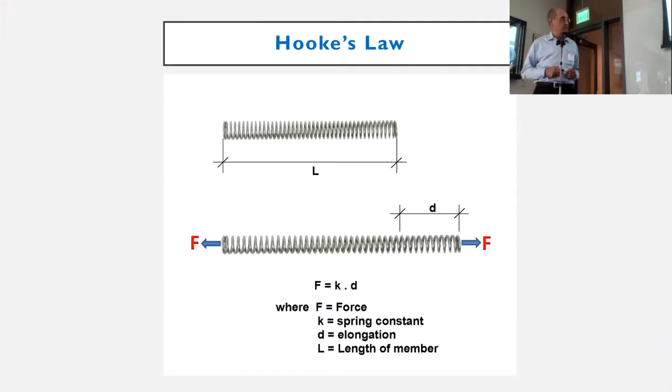I showed you the rubber band, what I was talking about, and that is when you pull it a distance, 1 pound and 2 inches, etc. But there is this direct relationship. The force equals the spring constant times elongation, and that is Hooke's law. And as I said, up to the end of the 18th century, that was the basic equation engineers used to make determinations on calculations, etc. So along comes Thomas Young, and what he does is as follows.

He says that there is a requirement that when you are trying to find out how material is going to behave, this K, the constant, is basically related to the material that you're testing. You need to know the area of the material. You need to know the length of the material. So in order to avoid all this, he formulated what has become known as Young's modulus.

For example, in concrete, in structural analysis, we're looking to see how much stress is generated in a member, typically a flexural member, compared to the strength of the material. So the stress is what we are calculating, and that is where Young's modulus comes in. We want to know whether this stress will be greater or less than the strength, and that will tell us whether the section of material that we're designing for is adequate or not.

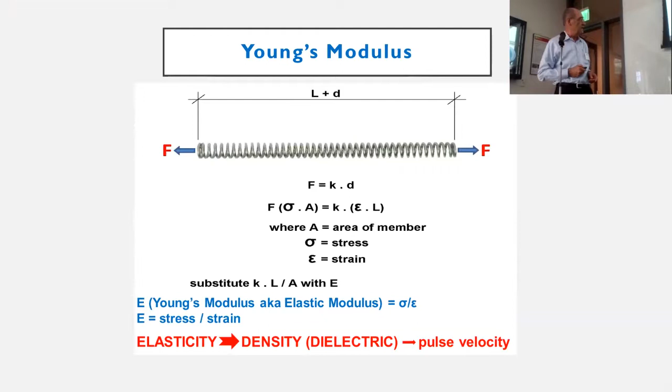Based on the equation speed equals distance over time, we can calculate how long it's going to take for that sound wave to go through the concrete from one side to another. So those are the basic elements that we're looking at. But like I said earlier, density is what you should keep at the back of your mind, because that's really what we're talking about. Okay, here's GPR data.

This is the most recent sophisticated piece of GPR we use. It's a small handheld piece of equipment. Mark Olson showed you, I think, one photograph of it anyway. But I want to show you how simple it is. It is a cart, it's got wheels at the bottom, and you just push the cart along the surface. It could be along a slab, and I'll demonstrate this later on, or along a wall,

and the cart picks up an image. The way it does it is it sends a signal from one side of the cart into the concrete or whatever the material is, and then that comes back. And it's the dielectric constant of the material that really tells us what it is. But the basic principle is that we generate a set of hyperbolas.

So just looking at the top graph here, this is a cross-section through a slab. This shows the top of the slab. This hyperbola, which shows the intensity of the steel that we just picked up, is because of its maximum. That is where the rebar or the steel is. And then you can see one here, one here, one here, etc.

So the way we do it is we push this cart along the surface. Let's say it's a concrete slab, and we'll pick up these hyperbolas. When we pick them up, we mark them up on the slab or on the wall, and that tells us where the rebar or the post-tensioning or the conduit is. So it's very simple, but I want to warn you that it is operator sensitive. Not everybody should be using this without going through a class on this.

Prior to GPR coming onto the scene, which was about 20 years ago, we used to use X-rays to find out where the rebar is in concrete. This image is of an X-ray, just like you would get at a doctor if you broke a bone. It shows you, through the concrete, the materials that have higher density in focus. So we've got here steel, steel, steel, crosswise in the center. This shows us where the steel is.

And the intensity of what you're looking at is developed through the equipment that you're using. So this could be higher intensity or lower intensity. But as you can see, the larger the density, this is more prominent, a lighter in color material. So this is all concrete. This is concrete, concrete, concrete. And these lighter lines are reinforcing steel.

Can I ask you a question? Sure. How do you determine a layer of steel? Top layer, bottom layer, can you determine that? Yeah, good question. Let me answer first with the X-ray. The X-ray is hardly used anymore because that's one of the difficulties. But the X-ray had a beauty to it because if you knew the thickness of the concrete and you could measure this distance on your X-ray, then by similar triangles, you can find out what the size of the rebar is, okay?

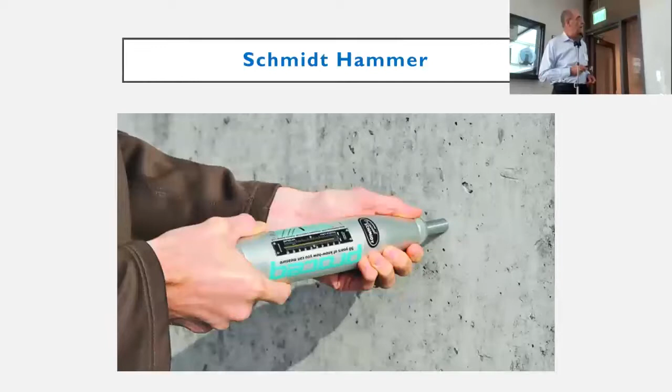So what you have to do is chip out one location. Once you've done that, and you know what that bar diameter is, then you can tell what the rest of the bars are in that configuration. Okay, so that is a slight limitation with the ground penetrating radar. Okay.

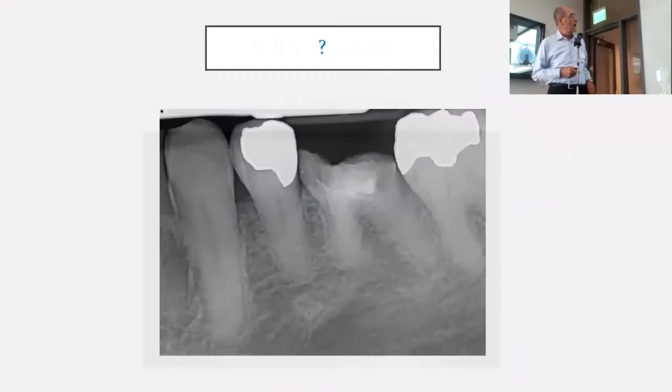Can anybody tell me what you think this might be? Excellent. Okay, this is an image. When you go to a dentist, and the dentist takes an X-ray image of your teeth, this is how it shows up. And this is exactly like the concrete image I showed you previously. See that? It's a difference in density. These are actually my teeth at a recent dental visit.

And here's the thing. This material down here, that's your gum. This material here that's slightly darker in color, that's the tooth. And this material that's very bright, that is the filling. So this is an example of how this X-ray works. It's basically a color difference. And you can use this type of image to investigate concrete, slabs, conduit, rebar. All these things can be done because of this imaging. So this is a very powerful tool. The GPR and the X-ray are very powerful.

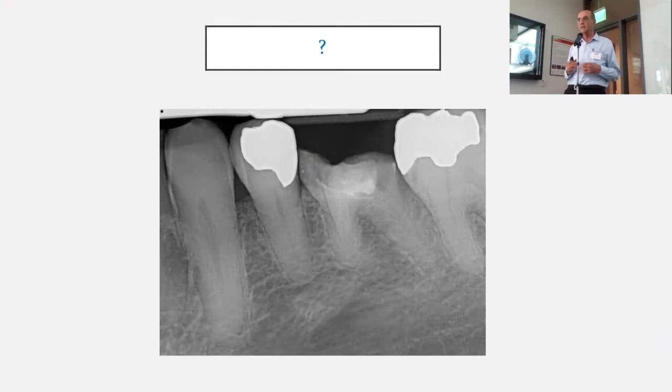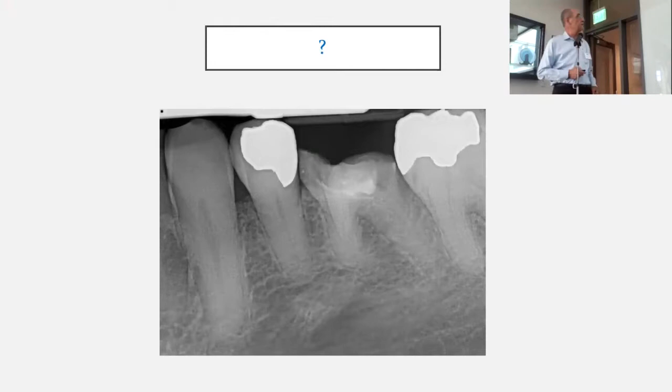Now, the problem with the X-ray, as most of you know, is that you need to protect around it when you actually shoot. That's why when you go to a dentist, they always put this cover on your chest to make sure you don't get any of the X-rays into your body. But GPR doesn't have that constraint, because it's totally okay to do, and it has no consequences that could harm you physically. These are the issues I wanted to talk about in terms of X-ray and GPR.

This slide is of a Schmidt Hammer. A lot of you are probably familiar with the Schmidt Hammer. The Schmidt Hammer gives you a relationship with the compressive strength of the concrete: this part of the Schmidt Hammer registers a number. So we have a number like 30 or 25 or whatever. And then we have a chart which tells you if it's, let's say, 25, it's 3,000 PSI concrete, etc. The beauty of it is it's non-destructive. Otherwise, if you wanted to know the concrete compressive strength, you have to take a core out.

Yeah. Do they have Schmidt Hammers for reinforced masonry? You know, you could make one, invent one, but there probably is not enough of a need for it. I mean, it's just a calibration of the spring constant. It's the same spring constant that I showed in that first slide, which was showing the F equals KD relationship. Spring constant tells you what the force is.

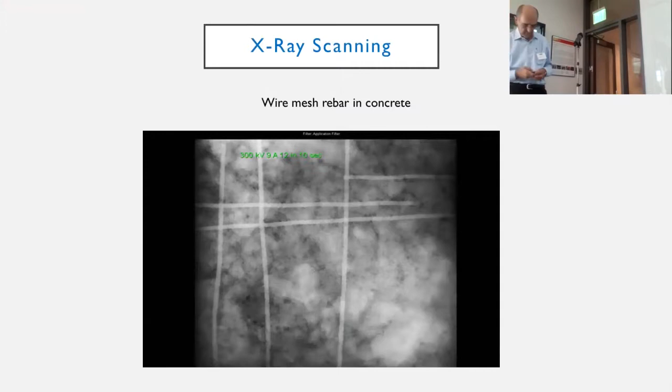But what you can't tell is the diameter. That's the unfortunate part. I went to training on this as well, and you need to calibrate it for each concrete slab or wall you're working with. No, you don't need calibration. It's already pre-calibrated. What you're measuring, again, is energy that's sent down into the concrete, and it's picking up a different type of energy when it hits steel. Now, it's possible we had plastic conduit, other materials too. So when it bounces off of that, it tells you where the location is.

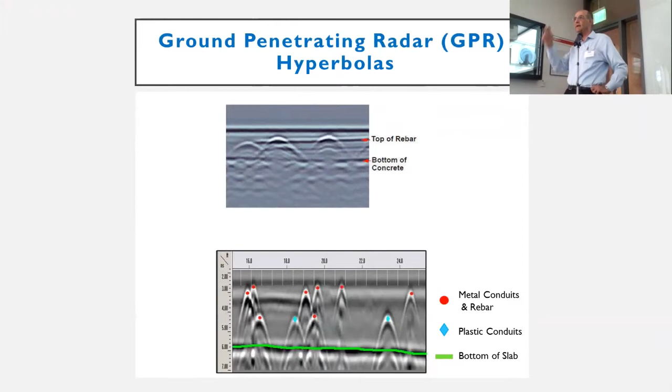Sorry, going back to the Schmidt Hammer really quick. What's the difference that you've seen between the surface concrete and the inner core concrete? What's the biggest delta that you have seen, and what would you estimate as a conservative deduction off of what you would read off of the surface? That's a good question. It's very difficult to tell.

The surface concrete that you're actually hitting with the Schmidt Hammer is measuring the strength of the cement paste in the concrete. Cement paste may or may not be the determining factor of the strength of the concrete. And as we know, compressive strength of concrete is really dependent on the water-cement ratio. So it's possible to have a really low water-cement ratio right at the surface, but inside, within the member itself, it's not that strong. And this is the problem with it.

Whereas when you core, you take a 4-inch, 6-inch, whatever diameter core, and you bring it back to the lab, then you're testing the entire section. So the surface strength does not play a role in this determination. So if you return 4,000 PSI, me saying I'll assume 3,000 or 1,500, it's just off the table to begin to say. Did you want to say something?

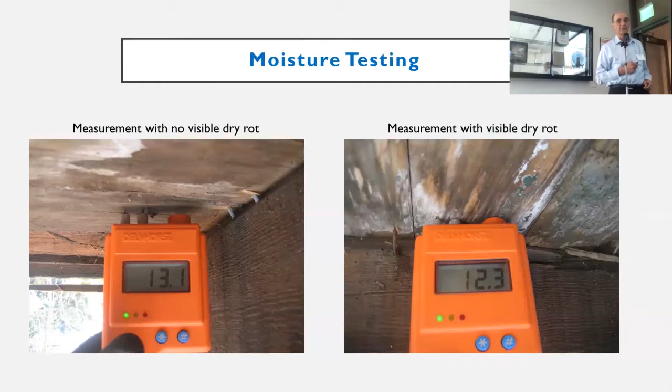This is a situation where there's no visible dry rot, but there's quite a bit of moisture. Recent rains or whatever could have moistened the plywood, and you pick it up in moisture content, but it doesn't show. Dry rot, there's visible dry rot, but the wood is dry. Not much visible dry rot, but it's pretty wet. So that's a good question. Okay, let me just go to the next slide.

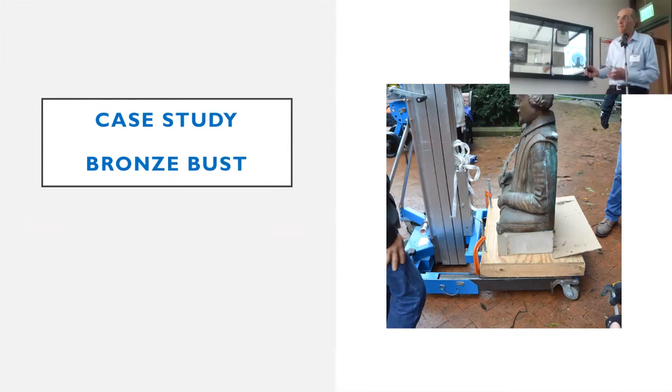With the GPR, scanning the surface and the other four surfaces and the bottom of the concrete, we could determine whether there was something metallic. The point was, was there a dowel that attaches the bronze to the concrete, or was this bronze sitting on top of the concrete with maybe a mortar mix or glue, something like that. And we were able to find out that there were 4 rods inside that concrete that you can't see, coming from the bottom of this pedestal all the way into the bronze statuette. So that's an application where GPR came in useful. It wasn't the typical use where we're looking for rebar.

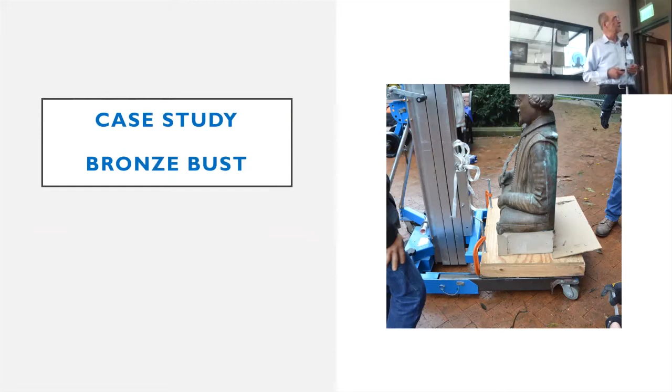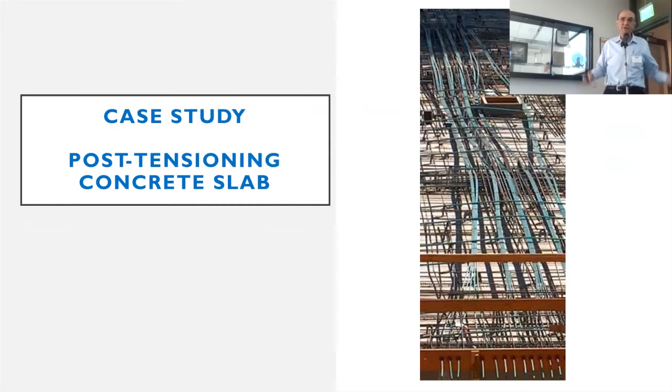Okay, this is the situation. To cut you off here, but he's on a time schedule. One more slide. One more?

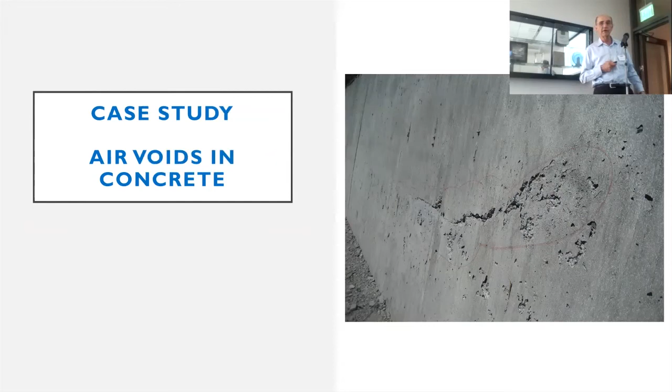Okay. This is a wall with adverse problems on the concrete surface. We talked about using the transducers to try to figure out whether there's voids inside. You can see the voids on the outside, but how do you know whether they're inside or not? That's where this comes in, the ultrasonic testing machine.

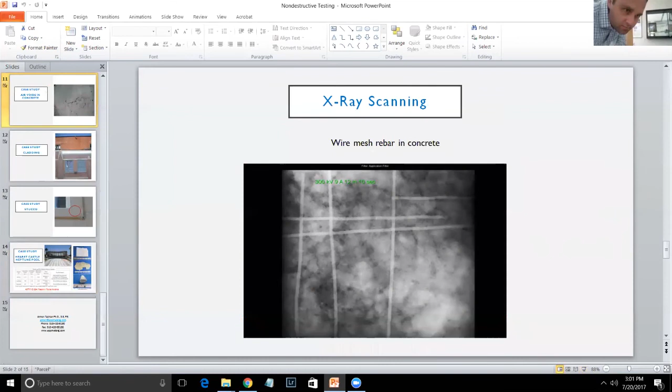Two quick things. This is actually for the benefit of our architect friends. This main issue here is when you have, oops, sorry about that. You have to go all the way back. I can skip you ahead. We need to move forward a bit. Okay, next one. So, oops, I'll skip the stucco one. Brick one is most important.

Where do you use the borescope? This is a good example where you use the borescope. You can drill a hole through the mortar joint and look into the wall cavity. You can tell whether there's moisture on the inside. There's potentially bad mortar on the inside. There's potentially some condensation. That's why we would use the borescope.

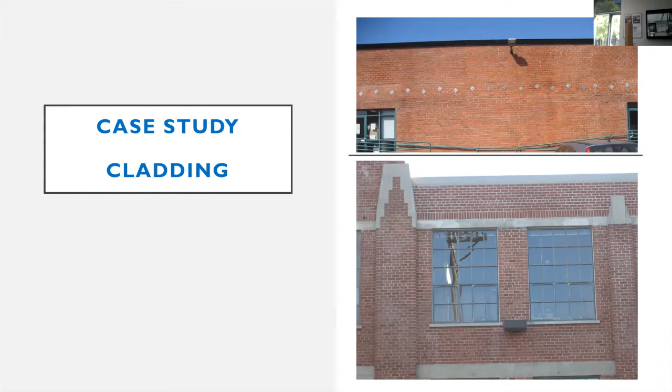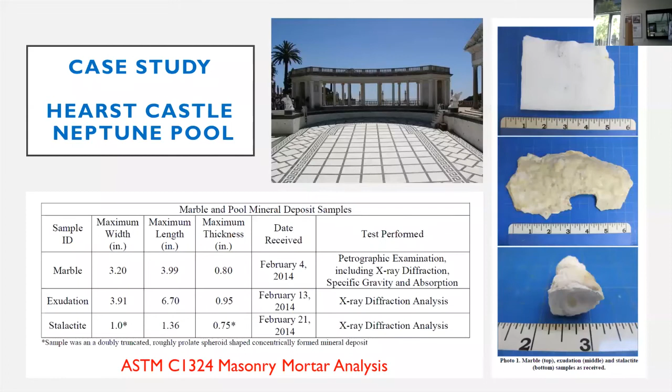Stucco, I'm just going to skip over this. This is the final slide. Case study, Hearst Castle, Neptune Pool. Oh. Okay. We did this for one of our clients. They were investigating the pool. This is marble here. And so we investigated the marble. We did petrographic examination, X-ray diffraction, etc., trying to figure out what the quality of the marble is. This is, of course, a historic building.

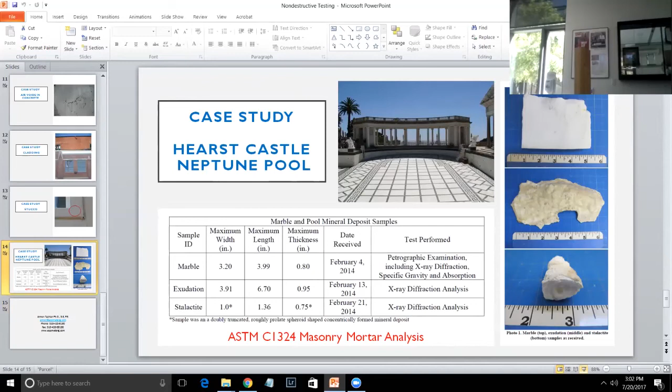These two are exudation. That's basically like the stalactite. It's calcium oxide that is carbonated, as hardened. So we did testing on that to make sure that there's nothing in those materials that is deleterious. And that's it. That's me.

I just want to tell you one final thing. Yeah. This material that we put out as engineers, it's pretty staid. I think most of it is boring, to be honest with you. But anyway, I hope you enjoyed it. I got to tell you a joke. It's an engineer's joke. Maybe you'll like this, maybe you won't. I don't know. So this engineer passes away, and instead of going to heaven, he ends up in hell.

Well, God is very upset. He picks up the direct line to Lucifer and says to him, Lucifer, you know that engineer you got there? That guy should be here in heaven, shouldn't be there in hell. Oh, Lucifer says to him, I'm not going to send this engineer back to you. This engineer is being so good to us. He's put air conditioning in here. He's put escalators in here. He's not coming back. No way is he coming back to you guys.

God says to him, you don't understand. This guy belongs in heaven. And if you don't send him to heaven, I am going to sue you. Lucifer says to him, yeah, right. And where are you going to find a lawyer in heaven to sue me?